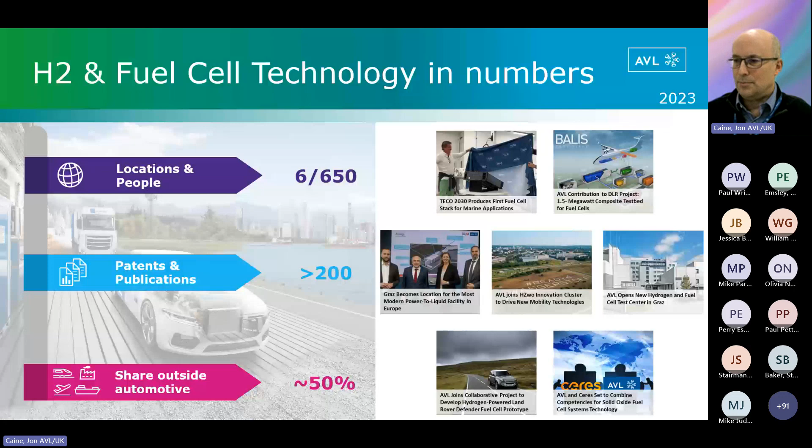We're active in the field of e-mobility. We entered the battery market and the fuel cell market about 20 years ago. And part of the reason for doing that was to get to the forefront of the new and emergent technologies. We also are looking at energy and infrastructure, the electric drivetrain, including the EDUs and the electric motors, and also the full propulsion systems, including all of the transmissions, drive lines, things like torque vectoring and autonomous driving.

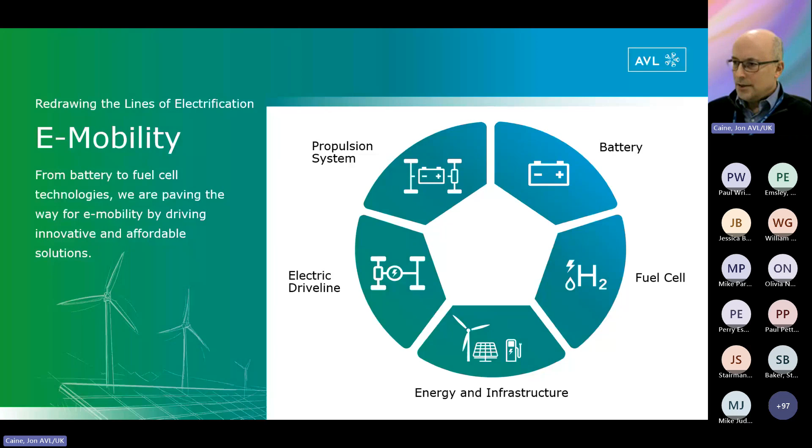So with that as a quick introduction, I'll start to talk about hydrogen and where we view the hydrogen roadmap. So if we start to think about the next 5 years, what we're seeing is there's going to be an increase in the electrolyzer capacity, which will start to drive the cost of hydrogen down. That will all be predominantly local production. And beyond that, we'll start to see the emergence of short localized trading. And so that maybe will take us up to about 2035. Beyond that, we actually see a global trading economy coming in, especially as we start to replace oil and gas. And in a similar manner to how we see crude oil global trading today, we expect that to start to emerge for hydrogen and hydrogen-related products.

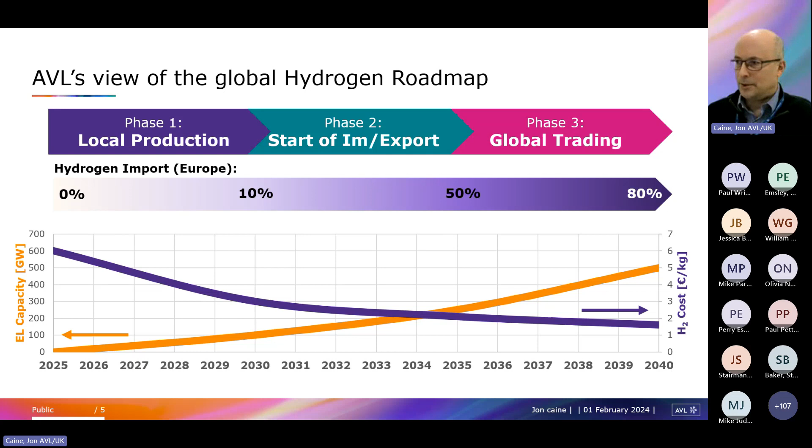So the first thing we have to do when we're talking about hydrogen is we actually have to think about how we generate it. And when we start to look at the electrolyzers, there's a number of different technologies that are available today. So we have the alkali electrolyzers. They are about 80 to 90% of the electrolyzer market today. And you can see they have reasonably good efficiencies of about 58%. We're seeing an emergence of PEM as well, so that accounts for the bulk of the rest of the electrolyzer market today at about 60%. And each of those 2 technologies have got their pros and their cons. So it's very much a case of playing upon the strengths of the relative systems.

We're seeing the solid oxide electrolyzers starting to come through as well. We'll see some examples of that in a minute. And they're starting to hit significantly higher efficiencies. However, they're also bulkier, heavier, and so they're more or less deployable in that respect.

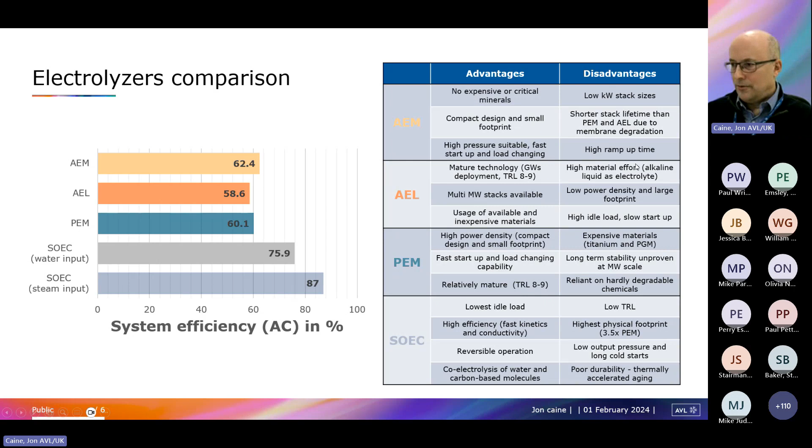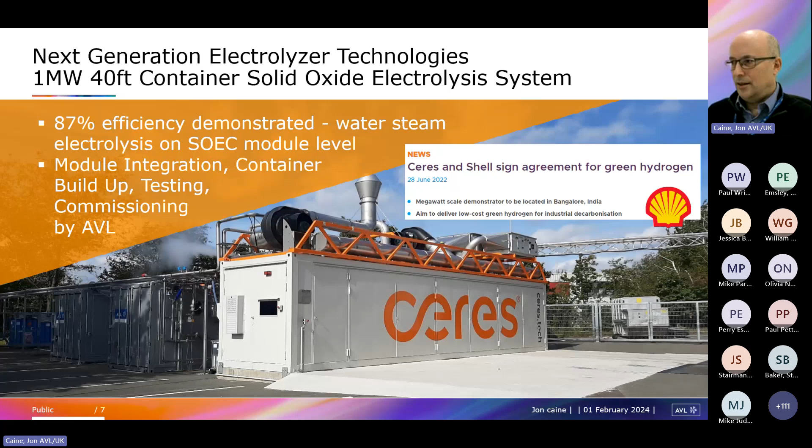So let's look at an example of that. So here's a 1 megawatt, 40-foot container solid oxide electrolysis system. And this system is based around the Ceres fuel cell, and it's an excellent system from Ceres. And we used that to demonstrate an 87% efficiency in the complete module integration and build-up. And that's now being sent out to Bangalore in India, having achieved that great milestone.

When we have the hydrogen, the other thing we have to do is use it somehow. There are a number of ways in which we can use it, and the first one that maybe is a little bit more traditional is we can burn it in an internal combustion engine. Now, hydrogen is actually quite a good fuel for internal combustion, and we already see people like JCB nailing their colours firmly to the mast in public, going for the hydrogen internal combustion.

We're also seeing a lot of interest in the market generally, and so you can see there on the top left the commercial engine that we've developed in order to demonstrate the capability of hydrogen. It does have a significant number of changes, and there are some challenges with using hydrogen as a fuel. But those are all challenges that we understand, having developed engines for 75 to 100 years. We understand all of those challenges, and they're relatively containable from an engineering perspective.

And so you can see the results from the engine. If you look on the top right, you see the brake thermal efficiency. We're achieving a peak brake thermal efficiency of about 43%, which for those of you with an internal combustion engine background, you'll realise that that's an extremely good efficiency. And the map is fairly flat as well, so we get that efficiency across a wide operating range of the engine.

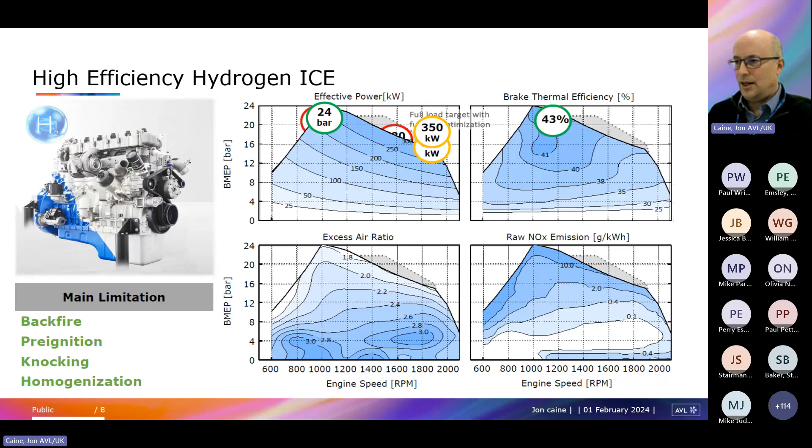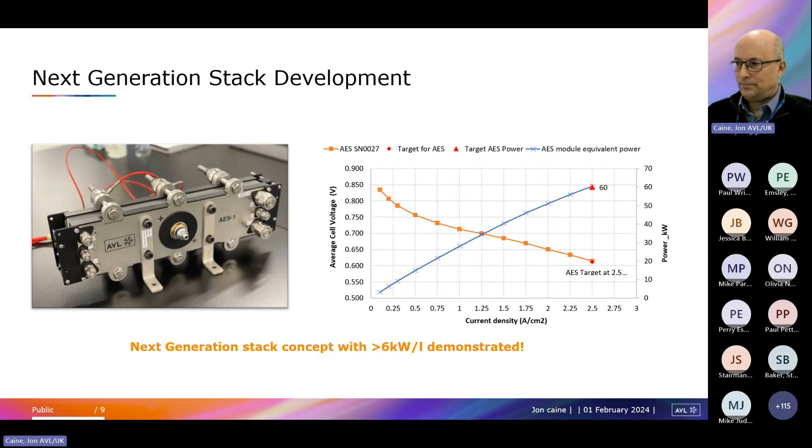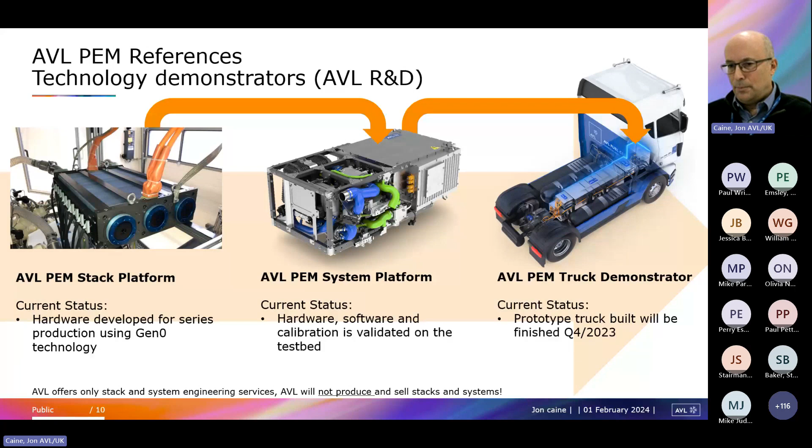Now, one thing that AVL does do is we don't offer the actual product because we're an engineering service provider. We're looking at this in order to develop the technology to have that available to our customers. The other reason we develop all of this technology as well is that we develop the tool sets that allow you to optimize. So here are some examples of the tool sets that we have. So AVL Fire and AVL Cruise.

AVL Fire is a multi-physics CFD. So this allows you to model all of the chemical reactions, the heat transfers, and all of the thermal effects within the fuel cell or the electrolyzer. It also allows us to do an optimization as well. So there's a built-in optimizer. So you can set certain parameters, certain boundaries, and you can let the program optimize for the ideal conditions and run through various scenarios. And that, again, is a way of getting the maximum out of the minimum amount of fuel cell.

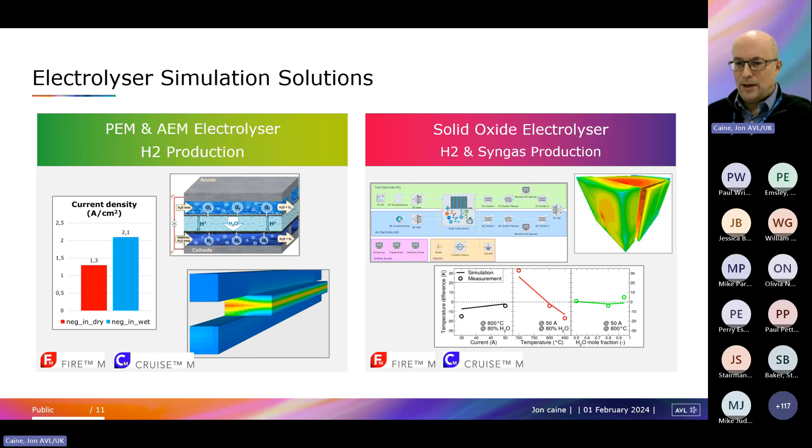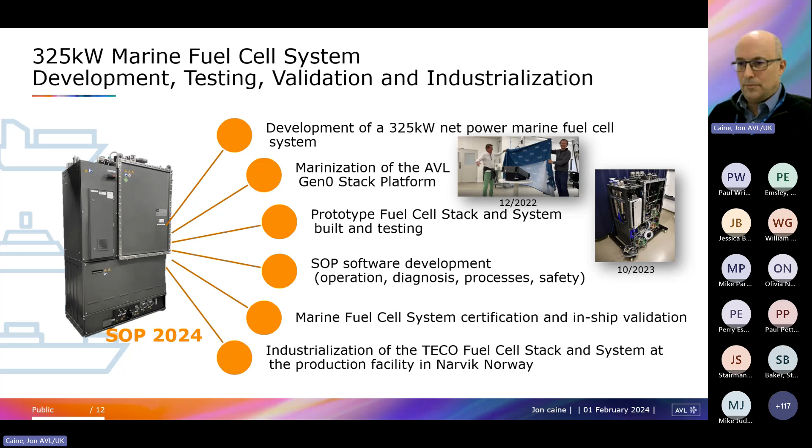Another reference project that very kindly the customers allowed us to share is the Ineos fuel cell Grenadier demo car. And so this was a vehicle that was built up, was demonstrated at the Goodwood Festival of Speed, and it's quite a rugged vehicle, and it shows the capability that you have within fuel cells now as a technology.

Let's move on a little bit from using the hydrogen directly. So we can also use hydrogen as an energy vector to transfer that into power to liquid. So here's an example of where you take CO2, water, power, and air. And here we go through an electrolysis step, and then we take it further on through water gas shift and Fischer-Tropsch in order to create synthetic fuels.

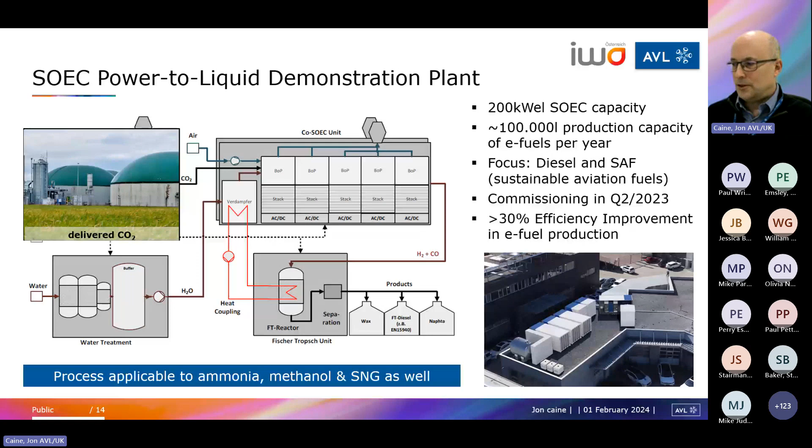Another big thing that you can do with the hydrogen is you can turn it back to power. So it's quite a useful approach to take that and put it back through a solid oxide fuel cell and to go for combined heat and power. And here we can achieve efficiencies of 50-odd%.

And the benefit here as well is that when we're talking about these efficiencies, the losses are still available as heat. So when you're talking about combined heat and power, not only are you getting very high efficiency, but you can also use the waste energy in order to do heating of buildings. And this whole system has got a very high system robustness.

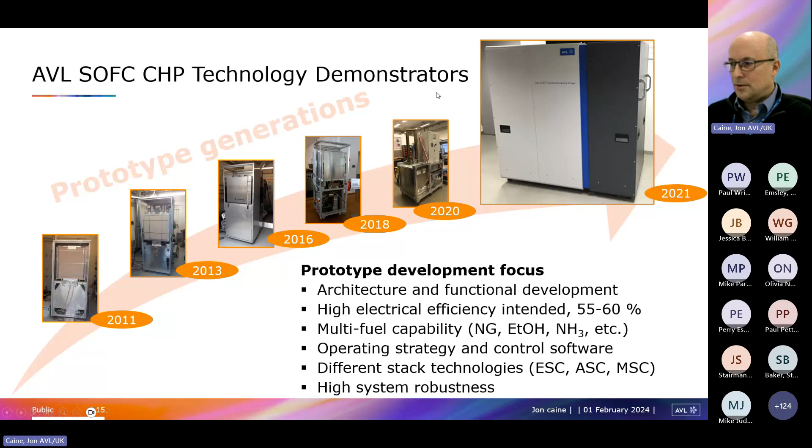The other nice thing about the solid oxide fuel cells is that you can use them as a modular system. So here are some examples of different fuel cell systems that we've been producing. Modularization again is the key, so you can put a number of these systems together, and you can look at also the idea of dual fueling.

So as of today, the predominant fuel that is being used is natural gas, and in some cases liquid petroleum gas. But these systems are hydrogen ready as well. So as we start to generate the hydrogen, as hydrogen starts to become the energy vector, then we can start to blend that into the natural gas, and we can run those into the solid oxide fuel cells.

So that was the quick 10-minute walkthrough. And we really do see hydrogen as the common denominator across all of the industries. So we see it going into the transport, either directly as hydrogen or being transferred through into alternative fuels for aviation and potentially marine. I didn't mention it, but we do see marine going to things like ammonia if we can solve some of the problems related to ammonia.

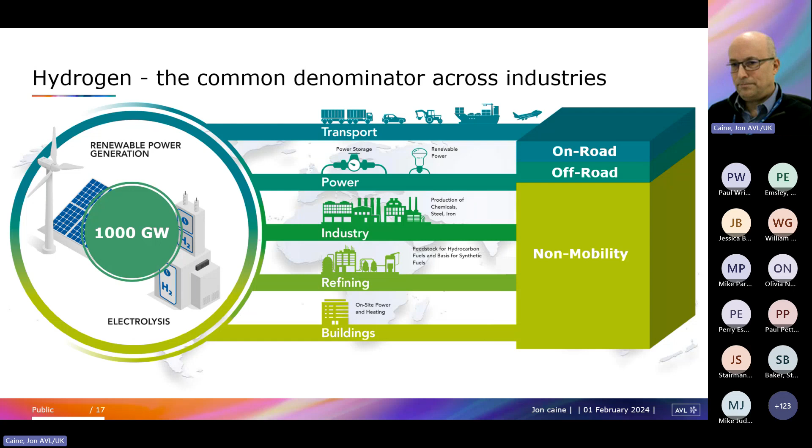It can be used in power, so we can use it to store underground in the hydrogen systems, and then we can put it back into fuel cells in order to repower the grid. It'll be used in industry, and it'll be used in refining, and then it'll be used in the buildings for on-site power and heating. So that gives you a quick 10-minute overview.